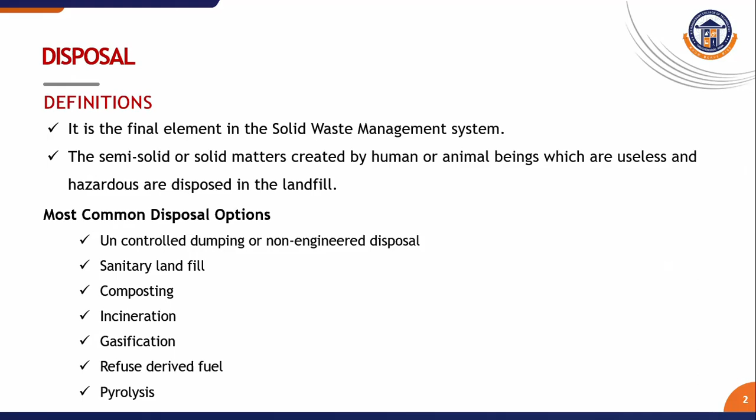Landfill is the final option for waste material. Very few landfills are available in our state, in metropolitan cities. When no more processing is possible, no more options, no more choice, landfill is the only option. We are going to be dumping the waste in the landfill.

Incineration is also one of the processes. Infectious waste, biomedical waste or chemical waste is going to be incinerated. And waste compaction: if the waste is very huge in amount, like mountains, like hills, these wastes are going to be compacted in the compaction machine or shredding machine. It is taken as bales and finally its size is reduced, and we can take it for landfilling or some other recycling purpose or paving of roads or any other purpose.

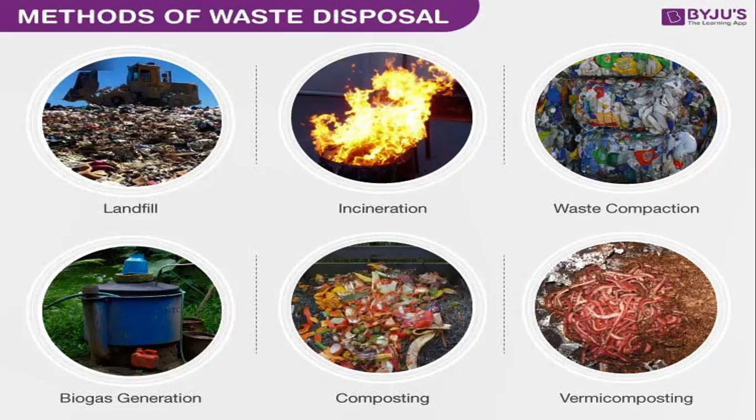Composting, everyone knows, like pit composting and windrow composting. Pit composting is the oldest method. In vermicomposting, different types of worms, particularly native worms, consume more waste. Finally, it gives good value manure which is used for agriculture. We get a good yield of fruits and vegetables, and it does not affect the soil. It is a very good method practiced nowadays in municipal dumping yards and treatment of industrial waste.

The landfill or sanitary landfill. Various gases generated in the landfill are methane 50 to 60 percent, carbon dioxide 30 to 40 percent, oxygen, nitrogen. The purpose of landfilling is to bury or alter the chemical composition of the waste so that they do not pose any threat to the environment or public health. Landfills are not homogeneous and are usually made up of cells in which a discrete volume of waste is kept isolated from adjacent waste cells by a suitable barrier.

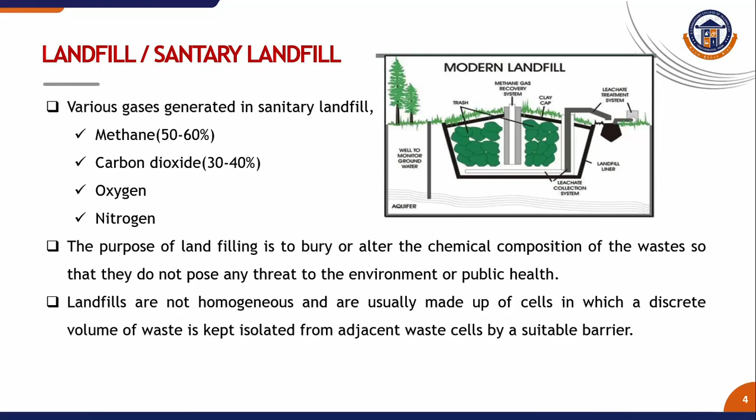A modern landfill is shown in the figure. The trash is dumped at the dumping place, with the clay cap, a system to take the gases away, a methane gas recovery system and a leachate treatment system. Everything is clearly indicated in the figure. If the garbage is there and rain comes, the contaminated water is taken for separate treatment.

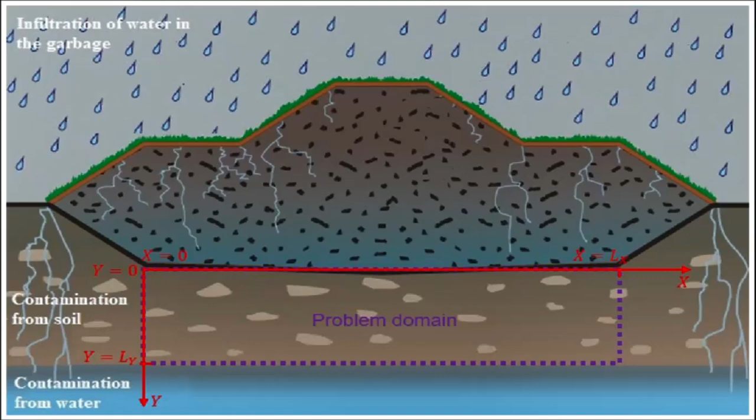The landfill closure is shown here. It is like a mountain. The waste is inside, but it should not affect the groundwater. It should not contaminate the soil. So site selection is very important for landfill sites. There is infiltration of water in the garbage, so it should be properly handled, managed and treated.

We are using fuzzy logic, analytic hierarchy process or machine learning, and sanitary landfill site monitoring is nowadays one of the arts, using software such as the sanitary landfill site suitability map (SLSSM), with accuracy assessment using AUC ROC for model validation. This technology is available because we are taking hospital waste as well as very big areas, managing the waste of the biggest metropolitan cities.

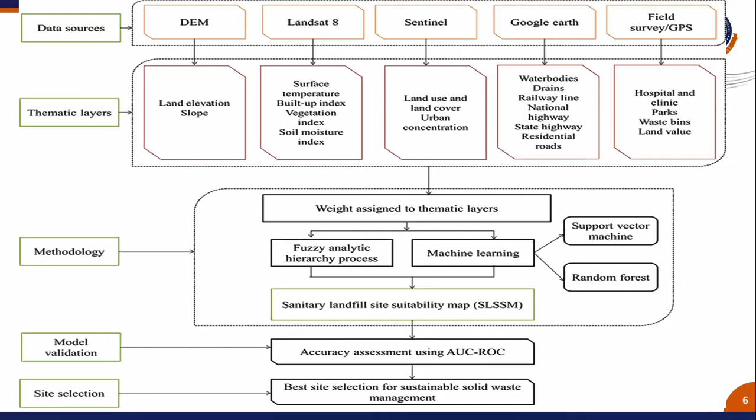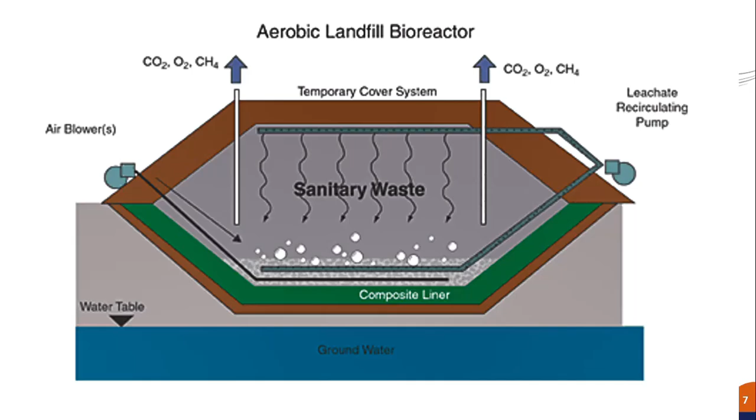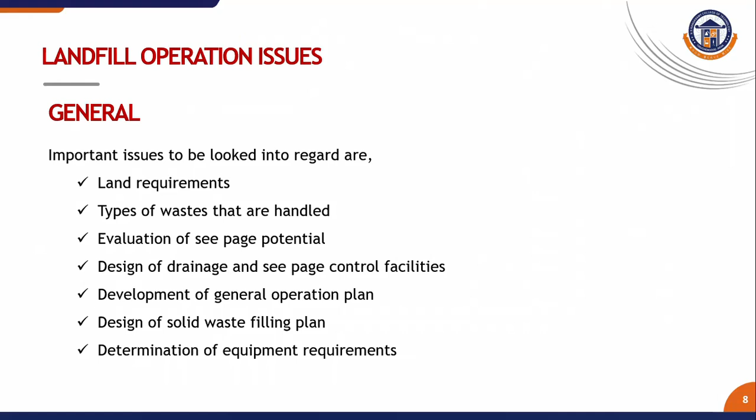Landfill operation issues: general important issues to be looked into are land requirements, types of waste that are handled, evaluation of seepage potential, design of drainage and seepage control facilities, development of a general operation plan, design of the solid waste filling plan, and determination of equipment requirements.

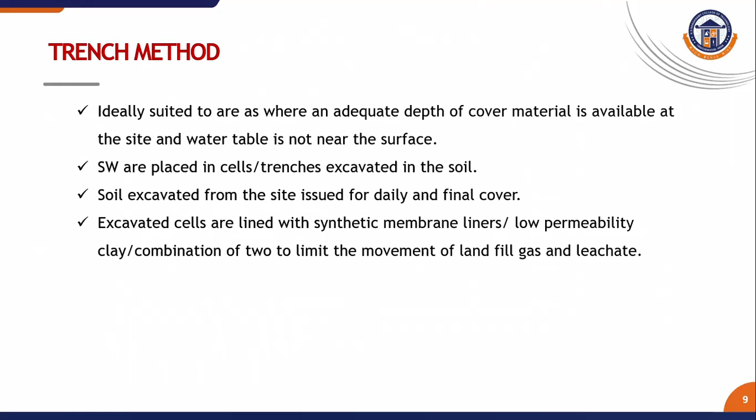The trench method is ideally suited to areas where an adequate depth of cover material is available at the site and the water table is not near the surface. Solid waste is placed in cells or trenches excavated in the soil. Soil excavated from the site is used for daily and final cover. Excavated cells are lined with synthetic membrane liners, low permeability clay, or a combination of the two to limit the movement of landfill gas and leachate.

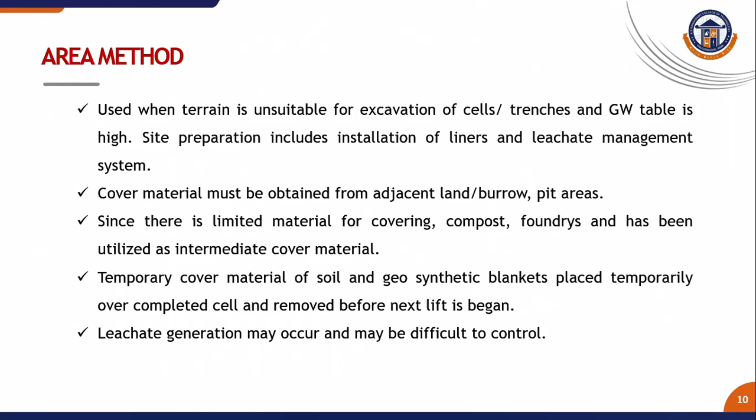The area method is used when terrain is unsuitable for excavation of cells or trenches and the groundwater table is high. Site preparation includes installation of liners and a leachate management system. Cover material must be obtained from adjacent land or borrow pit areas. Since there is limited material for covering, compost has been utilized as intermediate cover material. Temporary cover material of soil and geosynthetic blankets is placed over a completed cell and removed before the next lift is begun. Leachate generation may occur and may be difficult to control.

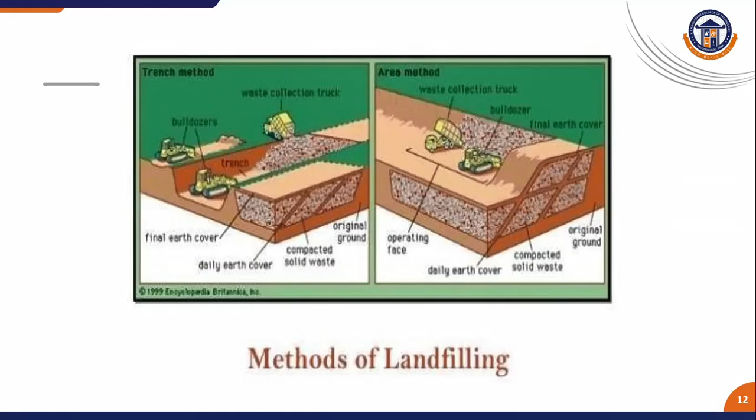The methods of landfilling: trench method and area method. Each method has some advantages and disadvantages. In the trench method, a lot of trenches are taken, like small boxes. In the area method, one area is marked, and after that another area is taken for the process. The other processes are the same: the final earth cover, daily earth cover, original ground, and compacted solid waste are more or less the same. We take area by area here, and like a trench in this method of landfilling.

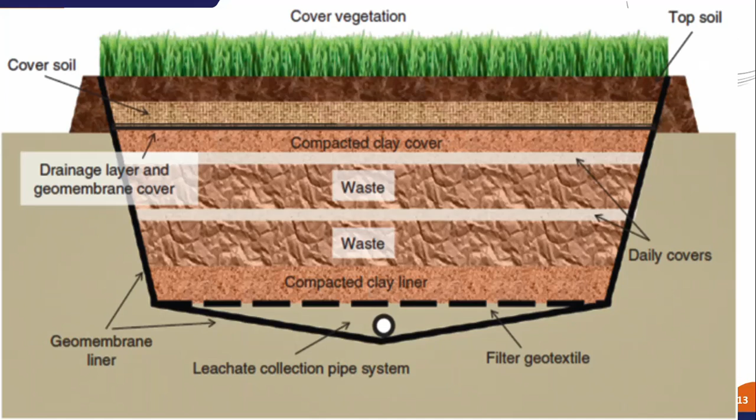Finally, after the landfilling, we make a beautiful top layer, which can be used like a park, with cover soil, cover vegetation, and topsoil. Waste is lying at the bottom. A compacted clay liner is given at the bottommost layer, with a leachate collection pipe system and geomembrane liner to avoid leakages and protect the ground. A filter geotextile is also placed.

Advantages of landfilling: incineration is a costly process, and its residue requires disposal on land. Composting is a seasonal option. It is not possible to reclaim and recycle all solid waste material. Thus, landfilling is a convenient option.

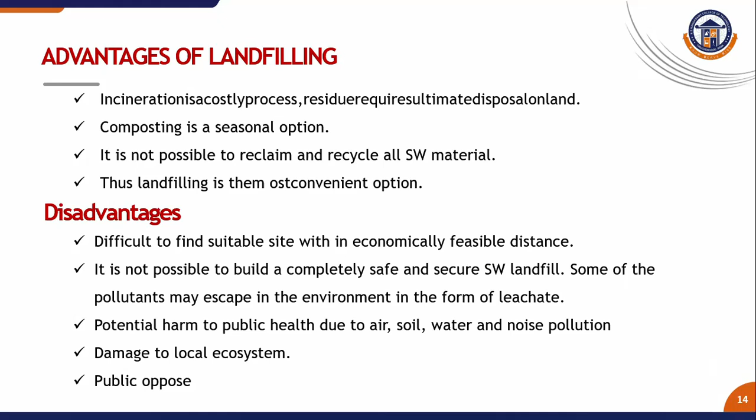Disadvantages: it is difficult to find a suitable site within an economically feasible distance. It is not possible to build a completely safe and secure solid waste landfill. Some pollutants may escape into the environment in the form of leachate. There is potential harm to public health due to air, soil, water, and noise pollution, damage to the local ecosystem, and the public may be opposed.

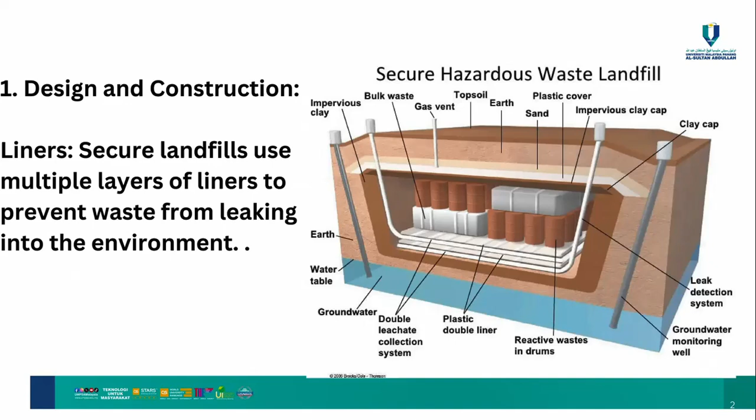Design and construction: liners. A secure landfill uses multiple layers of liners to prevent waste from leaking into the environment. Here, a secured hazardous waste landfill is shown in the figure. There is bulk waste, gas vent, topsoil and earth, plastic cover, sand and impervious clay, all properly laid, with a clay cap, protection of groundwater, a double leachate collection system and plastic double liner system. Reactive waste is also taken into consideration in the landfill. A leak detection system is also there, and the groundwater monitoring well is monitoring for proper landfilling.